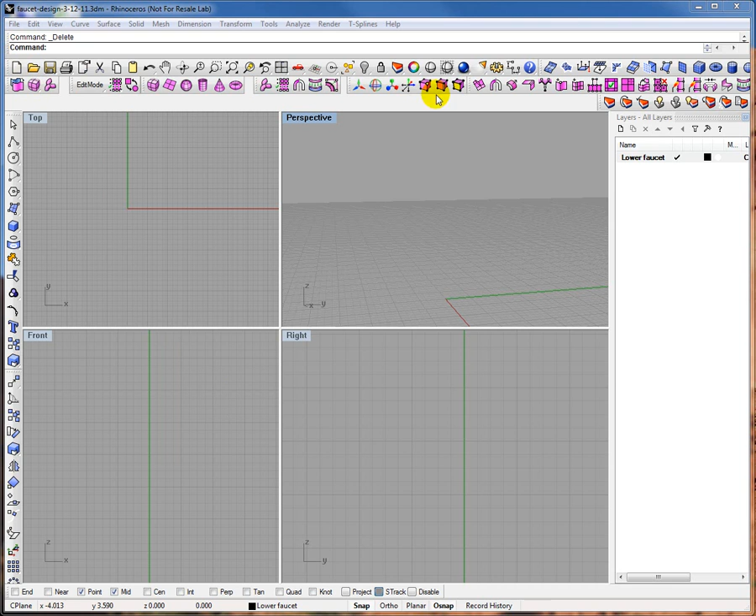So the way we're going to start this faucet design is to create a simple mesh primitive. I'll start in the top plane and make a 3-inch diameter mesh primitive. It's 8-sided, and for purposes I'll explain in a moment, I'm going to grab this and rotate it about that midpoint so this face aligns parallel with my x-axis.

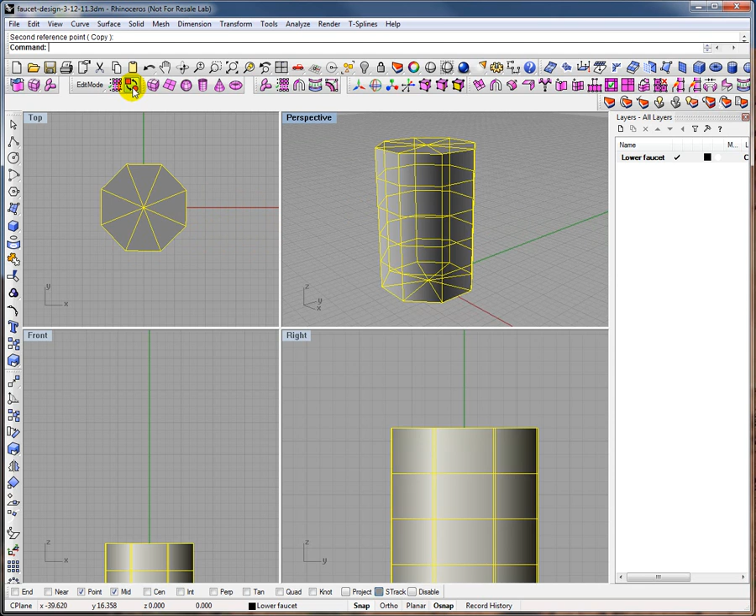Okay, so let's go ahead and just go right into T-Splines by converting this to a T-Spline and then showing it in smooth mode. So now we have that mesh toggled into a T-Spline and showing smooth.

The next thing I want to do is make this a more realistic looking cylinder with hard edges at the top and bottom. T-Splines by default, when they're created, are completely smooth objects. But fortunately we have a crease command to make hard edges.

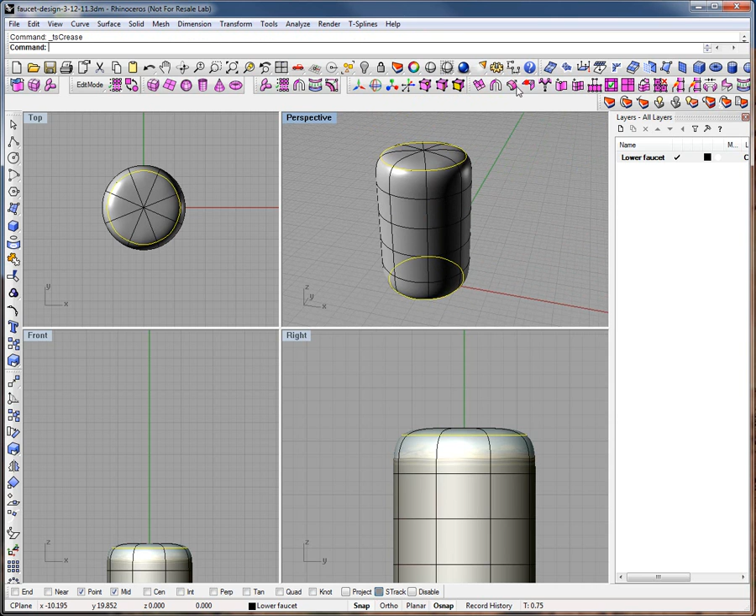So I'm going to go ahead and grab these edges and do the same with these edges, and apply a hard crease to the top and bottom.

Now I'm ready to go in and do a little bit of manipulation to my T-Spline to get the features I want. So what I'm going to do here is take this front face and start pulling it out to make my faucet design.

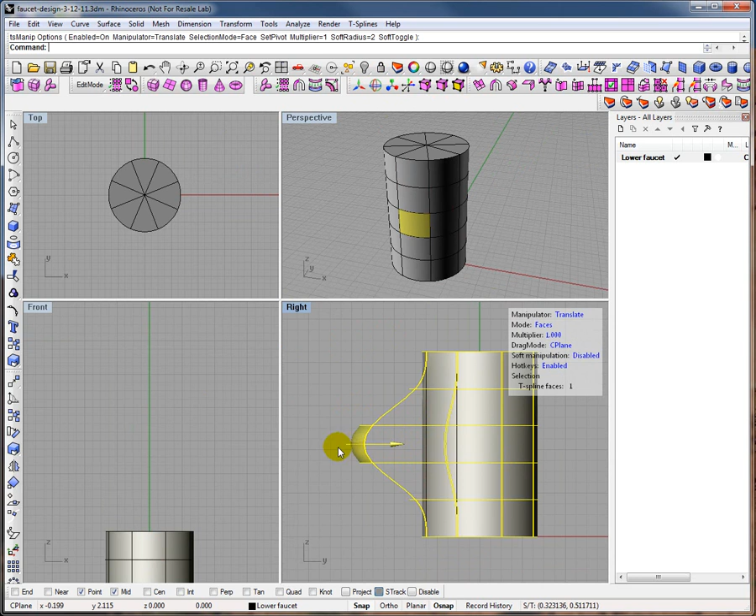So enabling that face, I can just start pulling on the model, pulling it out a bit, pulling it up a bit. Then in my top view I can turn on vertex selection and scale that out to get a little bit wider, rounder front end to the spout area of my faucet.

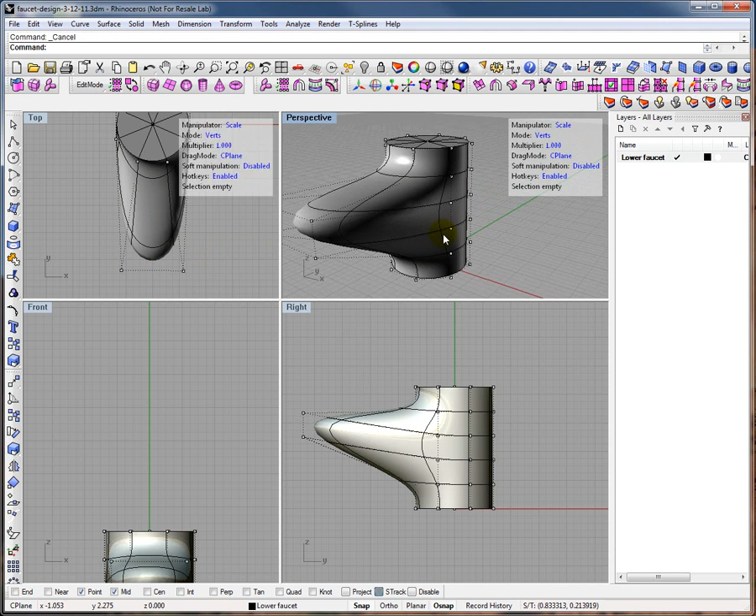Okay, so at this point I want to add another hard crease to this design. I'm just going to pick these front edges and apply a crease to those. You've seen designs like this from Kohler or American Standard, it's kind of a 90s design.

So I've got pretty much what I need, but now I just need to do a bit of adjustment. One of the things here is that this edge, if I get the whole loop by double clicking on it, at least I should be able to get the whole loop.

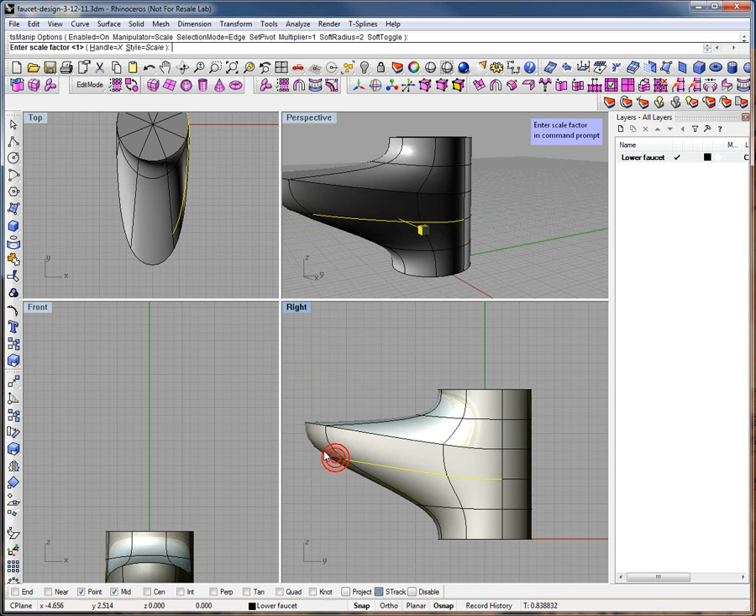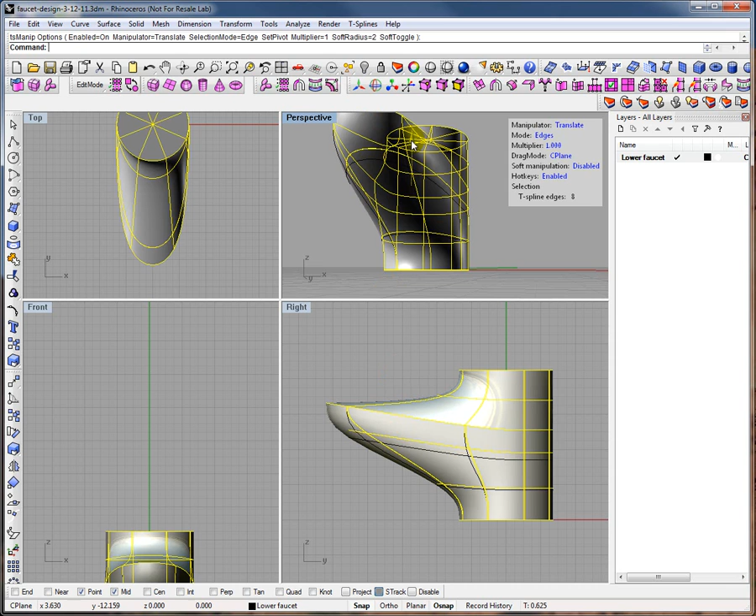Let's do that again, dropping out of our edit mode. There we go. I want to take that whole thing and move it up by a certain value. And then I see I'm getting too much of a sharp transition here in the front.

So I'll just pull that out again by grabbing these verts like so. And then I also want to pull these up too, so let's go ahead and grab those and pull those up like so. That's more like what I need.

But the whole thing's a little high now, so I can just grab all of those and pull them down. There we go. Let's do a bit more adjustment here.

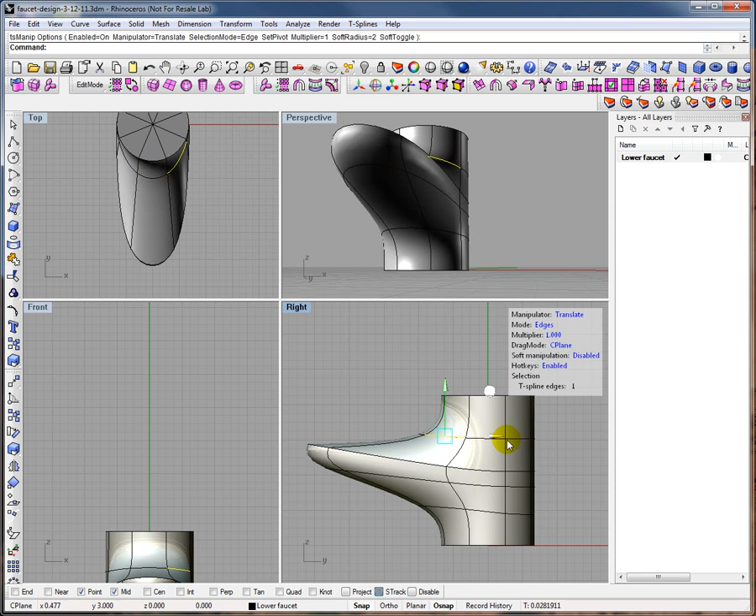Okay, that's looking good. Let's go ahead and grab this top edge again and pull it down. There we go, like so. Okay, that's looking good now.

So go back to our 3/4 view. We've got the basis for the lower end of our faucet design.

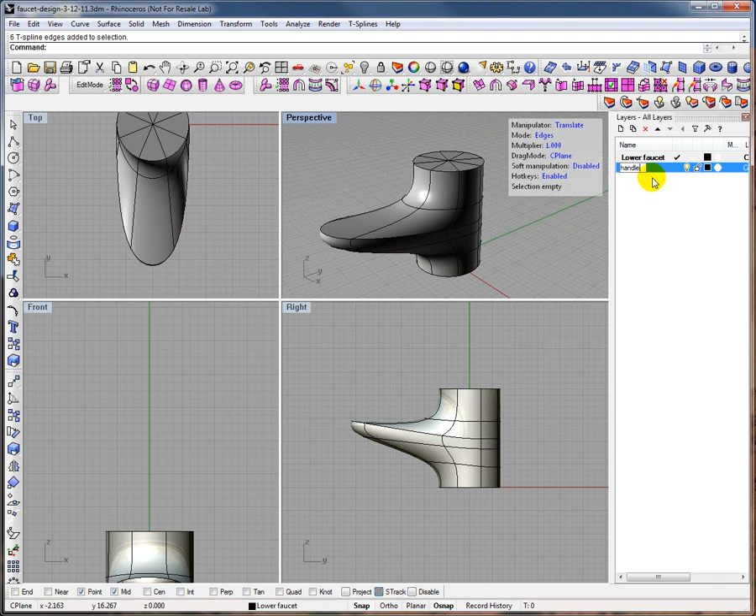So now what I'm going to do is create a new layer, call this handle, and go ahead and make it active. On it, I'll start a new T-Spline. So you can create multiple T-Splines and bring those multiple T-Splines into SolidWorks.

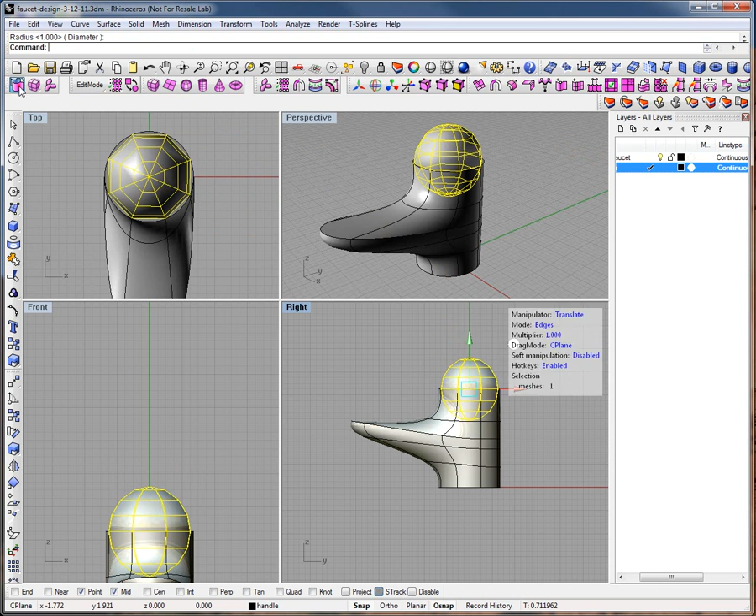So let's go ahead and create a spherical mesh primitive on the top here, and let's go ahead and convert that to a T-Spline. And there we've got it.

So we can take that object now and we can scale it. Let's go ahead and take that and just pull on it to make it match. Oops, I grabbed everything and I shouldn't have done that.

Okay, let's just grab this and then scale it. There we go. Okay, and let's get that back into a smooth mode.

Maybe... there we go. Okay, back where we need to be. So looks like that just needs to be scaled just a bit more.

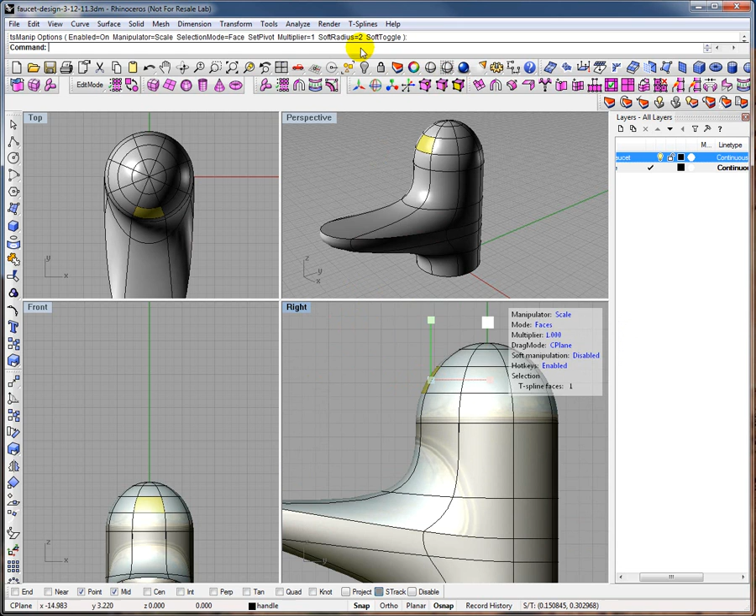That's good. Okay, so now let's go ahead and make our handle shape coming out of the front of this spout area. I'm going to just take and grab on this face here and pull it out.

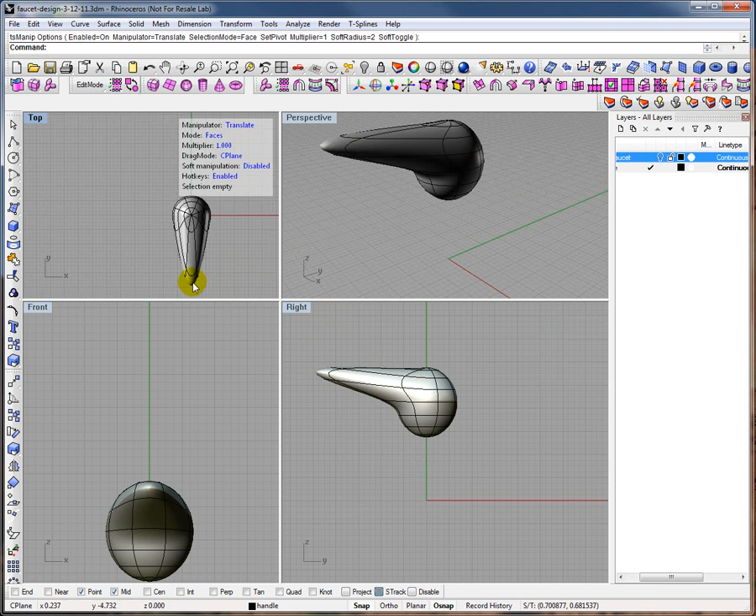And pull it up a bit to match our faucet area. Let's hide this for a moment and grab the verts in front here, and scale those along the x-axis to make it a little broader up front.

Okay, and then I want to go ahead and grab all these top edges and put a crease on them. So I'm going to crease those.

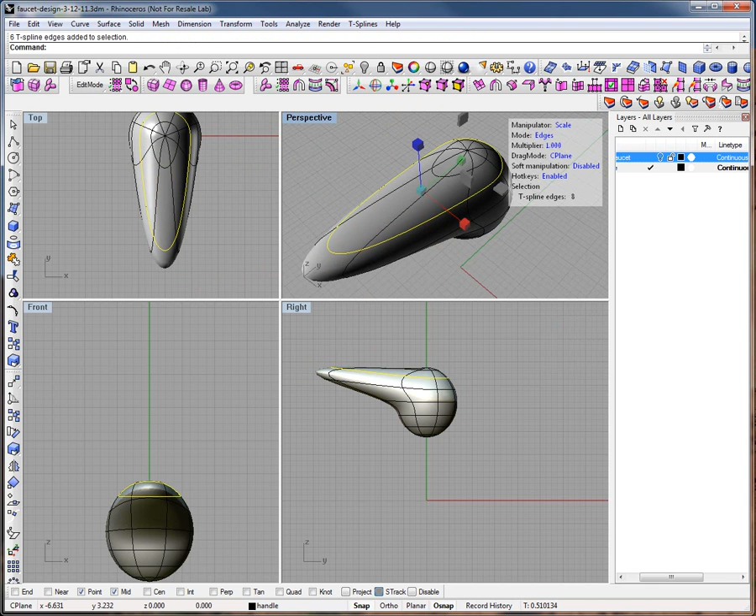And then I'll grab my vertices here for this dome and pull that down a bit, or I can scale it actually by this axis and then pull it down like so.

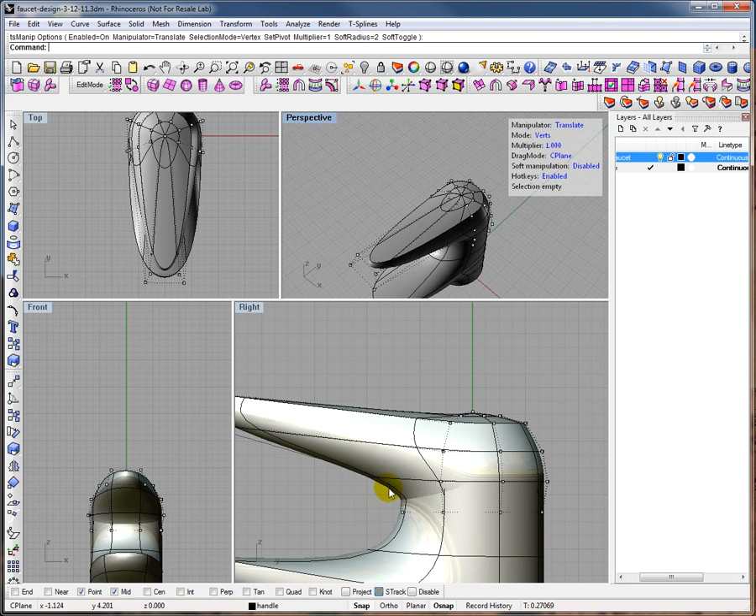Okay, so one thing I noticed here is if I turn on my layer for my bottom, is that we've got a mismatch between these two here. I think what I can do as a strategy is grab these verts and pull them in a bit, or create a new crease here to tighten this area up. So I'm going to add an edge to the model.

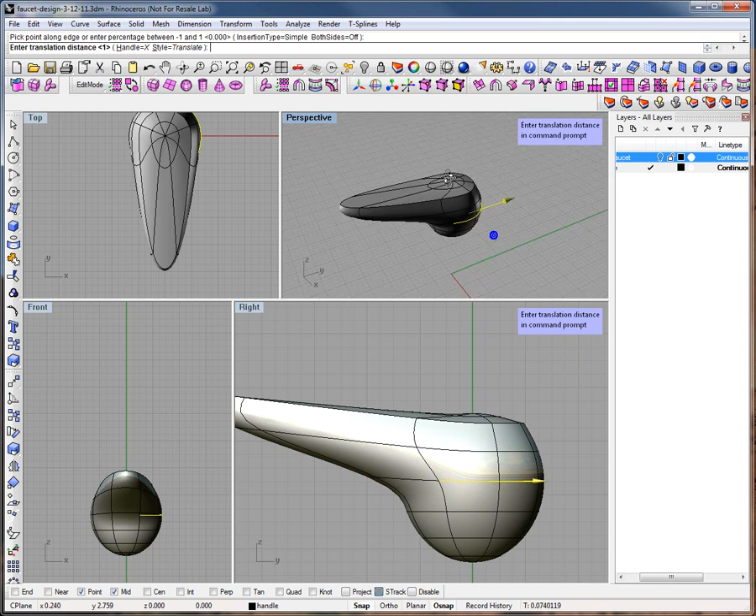Using this edge I'm going to add a crease right in here, but I need to grab all of that - let's do that in our 3/4 view here. There we go. And now we can go in and add an edge right in here to the model. There we go, and now you can see we've gotten a sharper transition because we've added new topology.

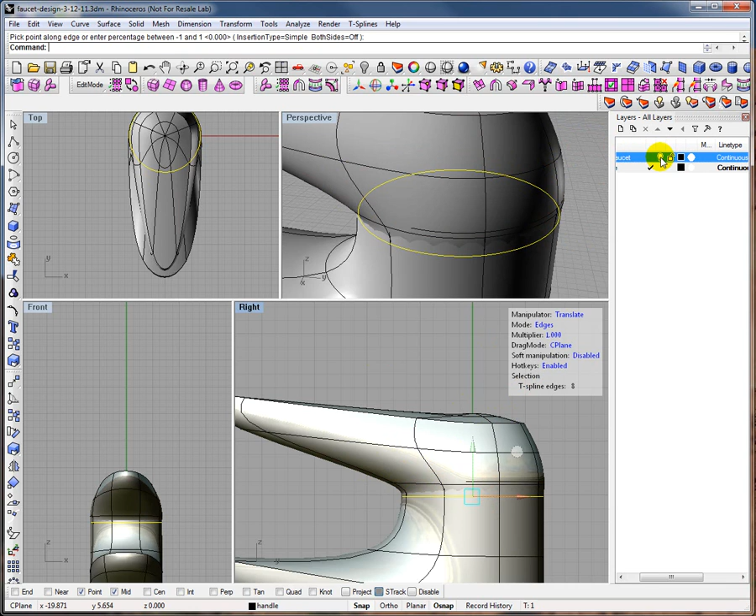To the sub D. So let's go ahead and turn that on again, we can see a little bit better match. And now with that in place, I can just grab these verts up front here and maybe scale those in from the top. So let's do that.

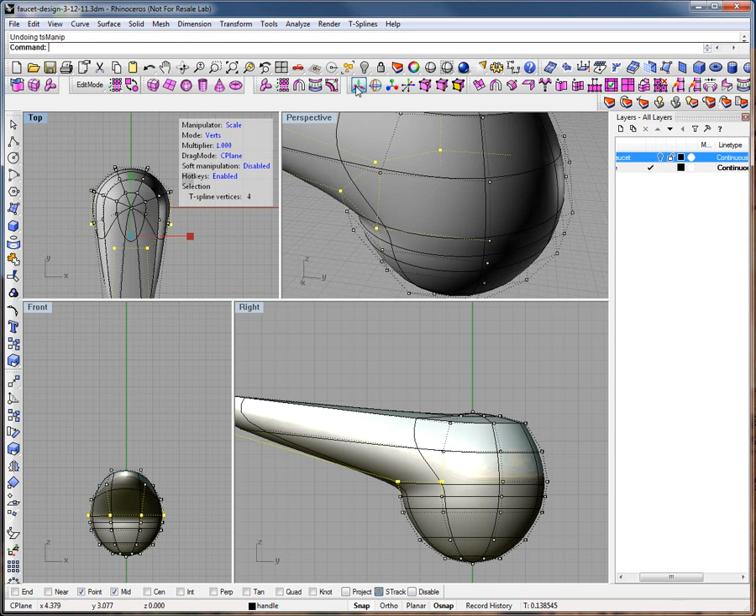There we go, let's maybe just pull them back a bit. And then to get a tighter radius here, we can actually just grab these verts and pull them up to here. So now we have a pretty good match on that bottom.

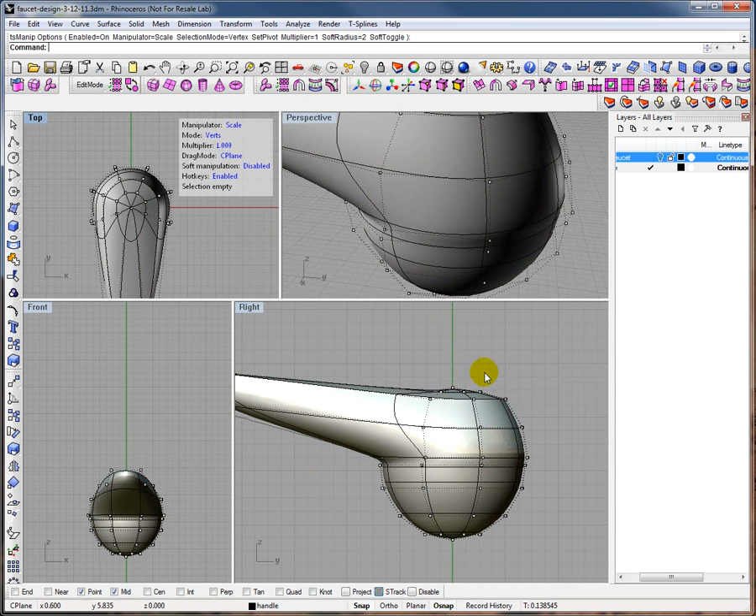I think to get these transitions here to work a little bit better, we'll just scale those back a bit. Okay, so there we got it.

So of course we could do a lot more, but with the time I have to present this, I'll just kind of move ahead. So now we've got a basis for design. So let's get over to SolidWorks and see what we can do there.

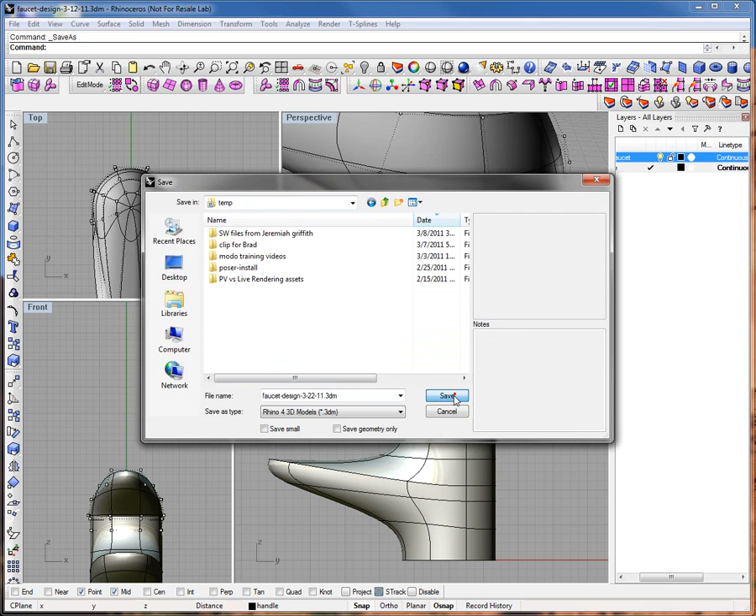So first I'm going to save this out as a faucet design by today's date, and just put it over in my temp directory. And we saved that. So let's bring up SolidWorks and open up that T-Spline file.

So here you can see we can import TSM files or OBJ files. I'm going to pick this, go to my temp directory, and then go and open up that T-Spline file. So you know what? I think I didn't save it as TSM out of Rhino, I saved it as a Rhino file.

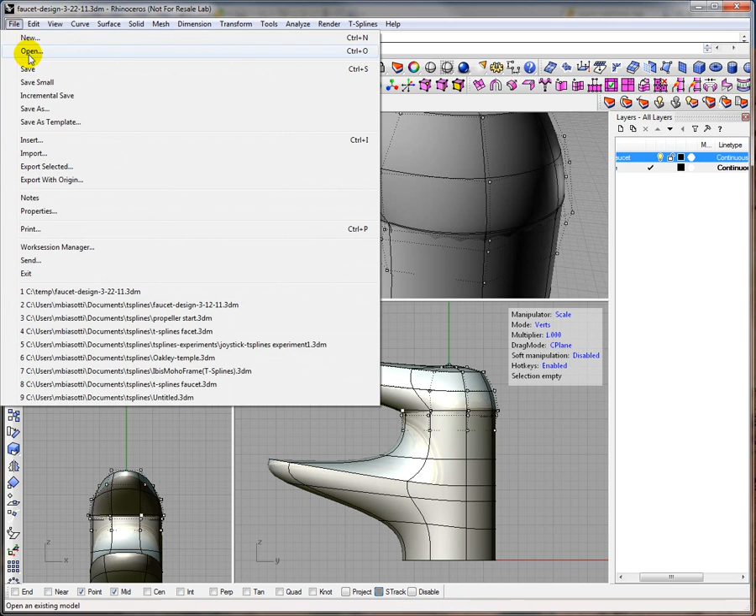So let's save as a TSM file. And you can't see it here because this is too high, but let's go down right here to our temp. Okay, that looks good. Okay, so let's jump over to SolidWorks and open up those TSM files, and let's make sure that comes in an inch.

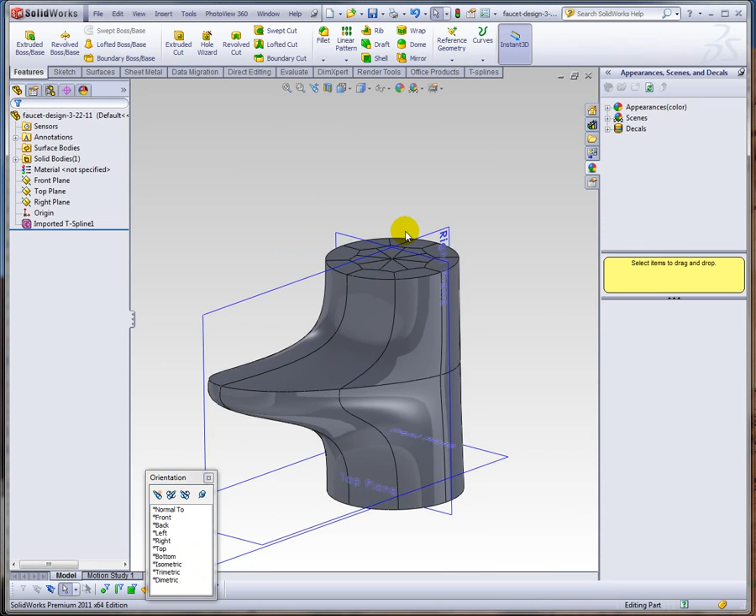Okay, so one kind of byproduct of doing a crease in a T-spline in Rhino is that you get this kind of result in SolidWorks. Now this is completely planar, but it's segmented to get the sub D solution, and I could delete all these faces using my delete face command and then build a planar surface there pretty easily.

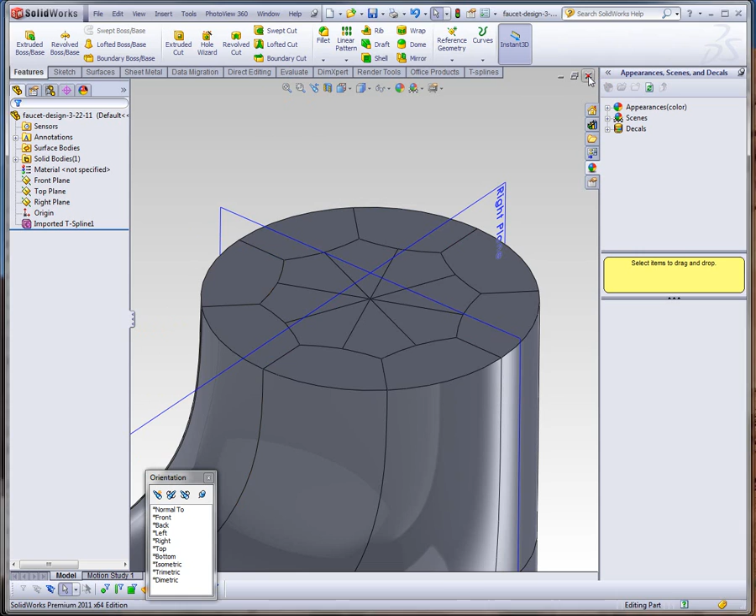But alternately, we could also just remove that face in Rhino. And so let's do this. Let's just pick these faces and hit our delete key. And let's do the same for the bottom faces.

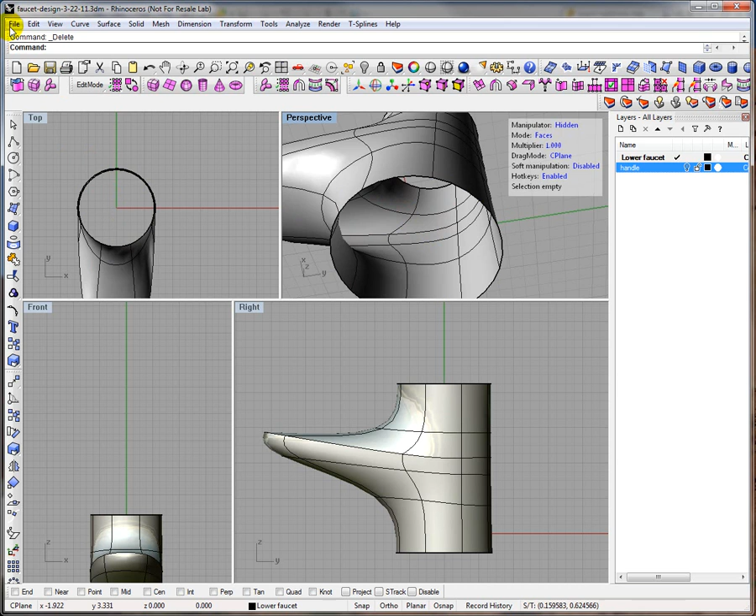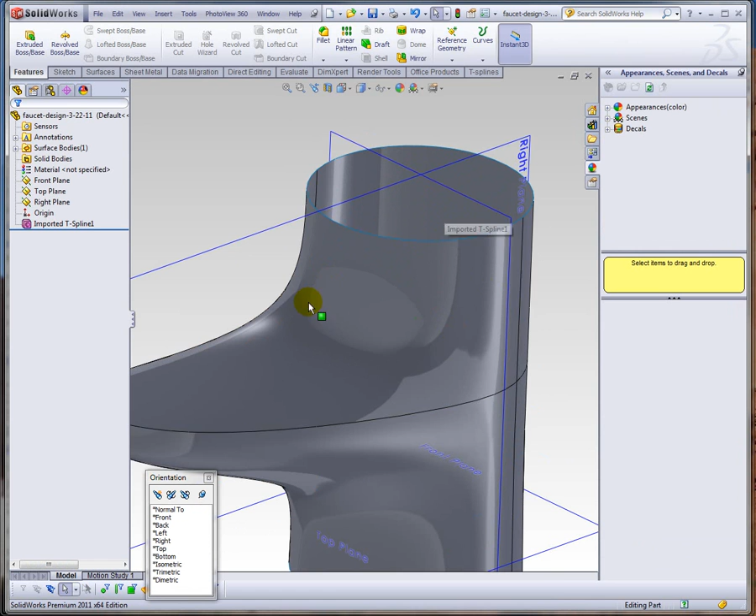And now let's go ahead and just save again this T-Spline file. Let's go back to SolidWorks and open that up again. I don't know if you can see this, but here's the drop down for 3DM file type. Okay, there you have it, we have the T-Spline surface body now, but without these faces.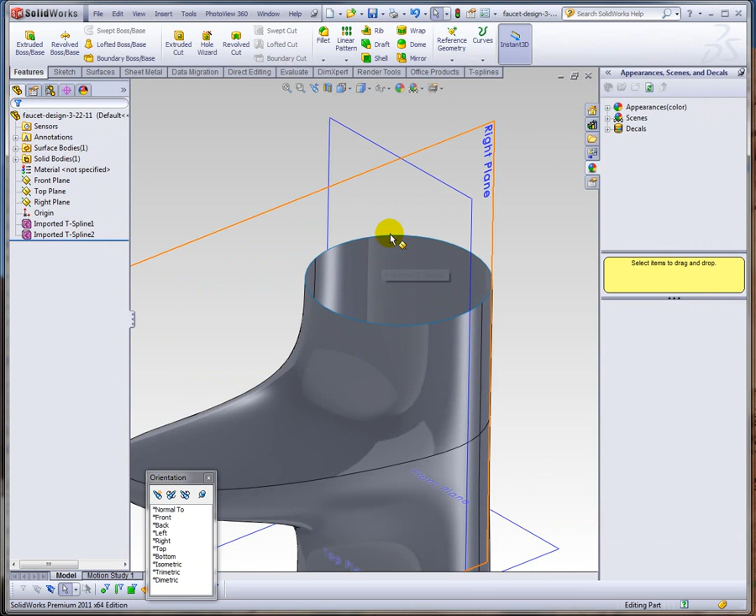So while we're here, let's just go ahead and load the handle also, and let's make sure it comes into the same current file in inches. There we go. So let's go ahead and hide the handle for the time being, and let's just make this solid again. We can do that really easily.

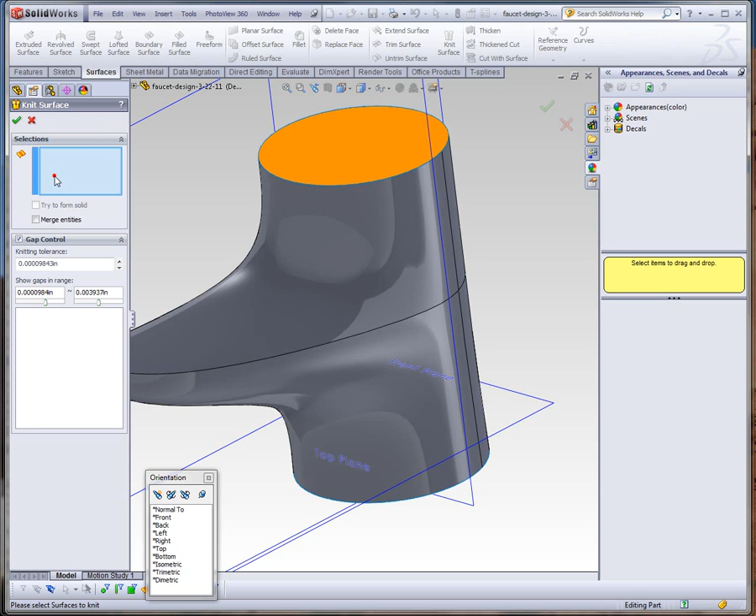Again, as I said, by using planar surface, selecting open loop, doing the same on the bottom here, open loop. Okay, and then going and knitting this up using these faces and making solid.

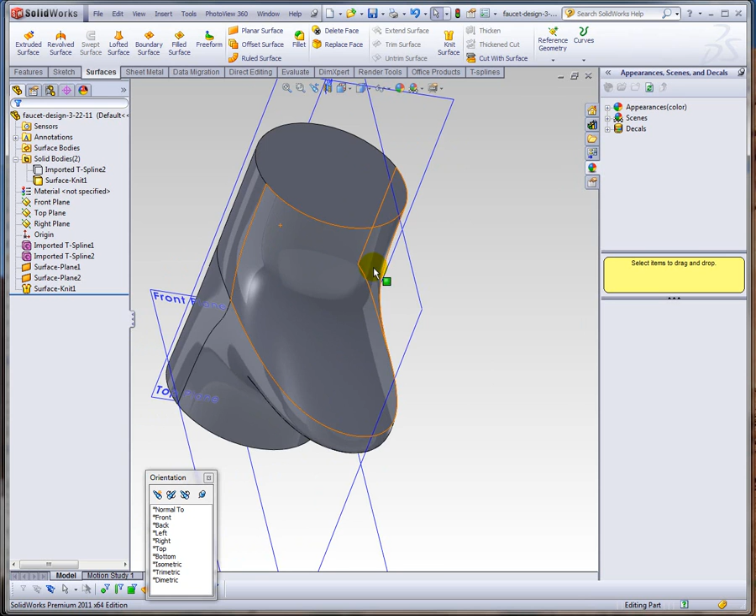There you go, so you can see that we have a solid model, or two solid bodies, handle and the lower part. But you know what, I see something here I don't like, and that is that I must have pulled something in Rhino here to make this asymmetrical from left to right side.

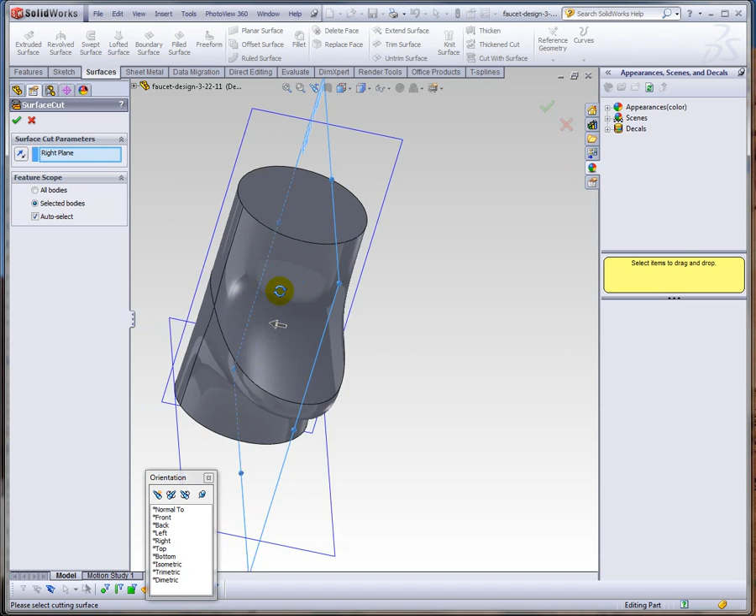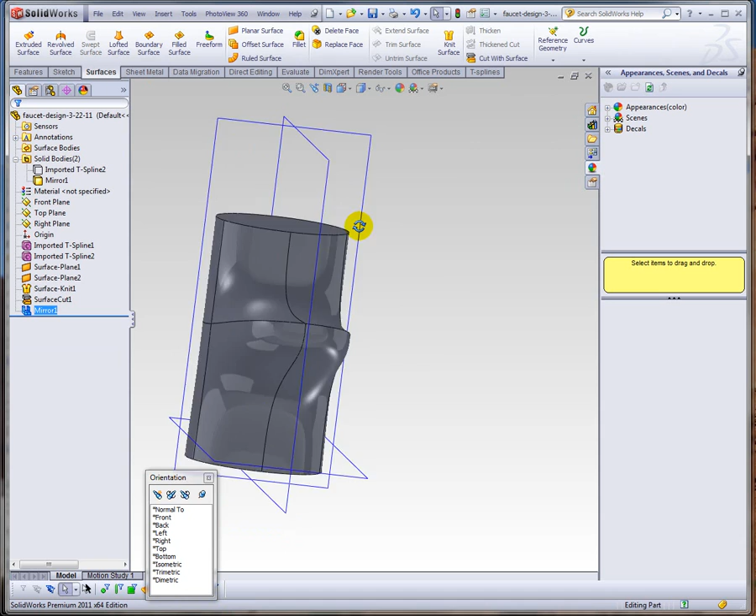So I'm just going to quickly cut this solid using this plane. And let's see, we want actually this side here. So picking this body, we'll keep that side, then we'll mirror it back - feature mirror using this body across the right plane, merging it, and now we've got something that's symmetrical.

And so now at this point, let's go ahead and just start shelling. So we're going to use these as a remove faces, give it a 1/10 of an inch wall, and now we've got a shell.

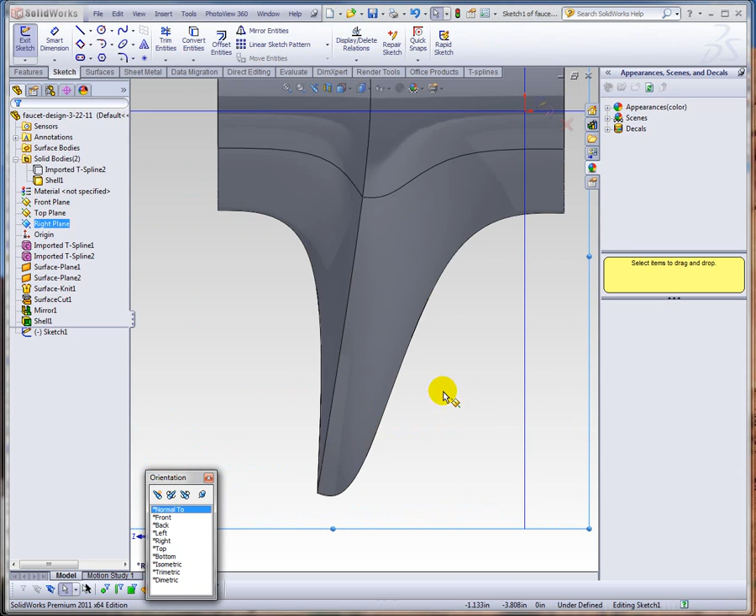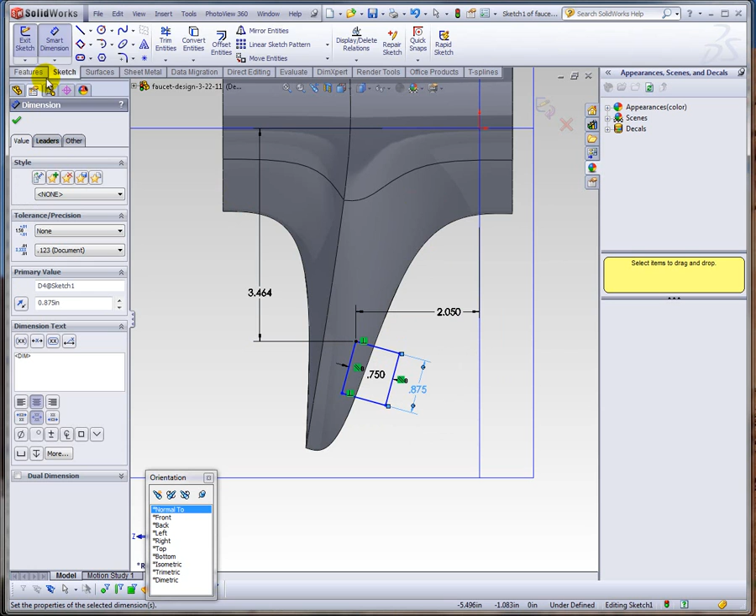Now let's go further and use SolidWorks for the things we want to do here, and that is to create some details. I'm going to create a spout detail, revolve this shape, and give it some positional dimensions from top plane, front plane, a distance here, and a revolve of .750. Let's go ahead and revolve that using this as our axis, and merge it right into our lower faucet design.

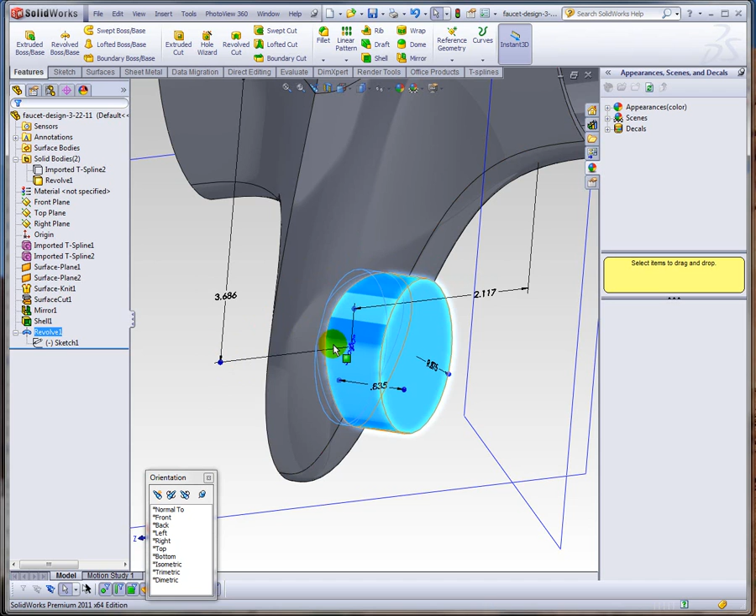You know what, I think it's a little big and a little too far back, so let's do some adjustments here. Let's bring it out a bit, forward a bit, and reduce its diameter a bit. Okay, I think that looks good.

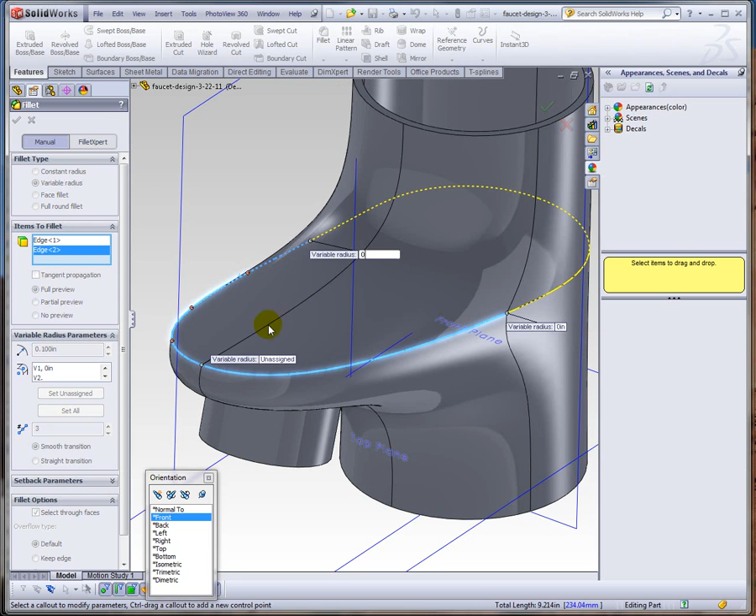Now, since you can't really have sharp edges in castings like this, let's put a variable fillet right here. We'll use a variable fillet, picking these edges, turning off tangent propagation, making the beginning and ends 0, and the forward 1/10 of an inch.

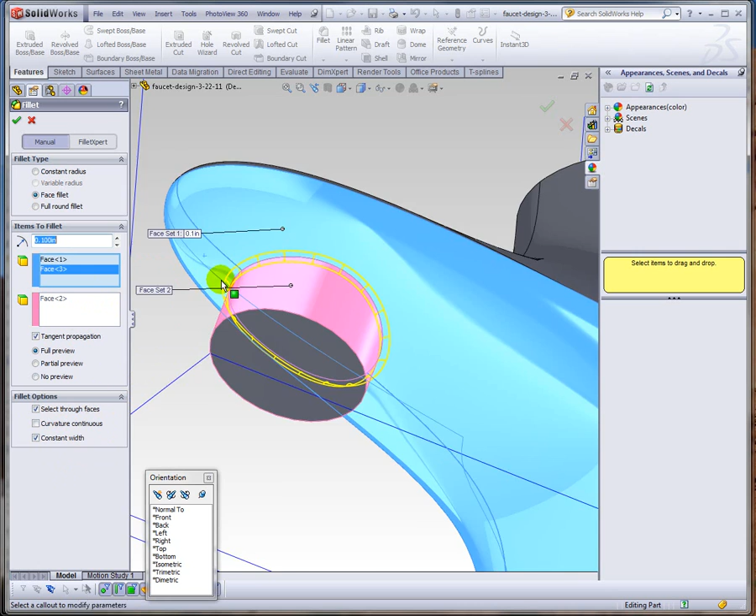And then let's also put a nice fillet transition here, but since the angle of incidence changes quite a bit between these two faces, I'm going to use face to face, and then make it constant width. That way we get a nicer transition between the two. Let's include that there, and bring it up to about 0.3. Now we've got a really nice transition in the spout area.

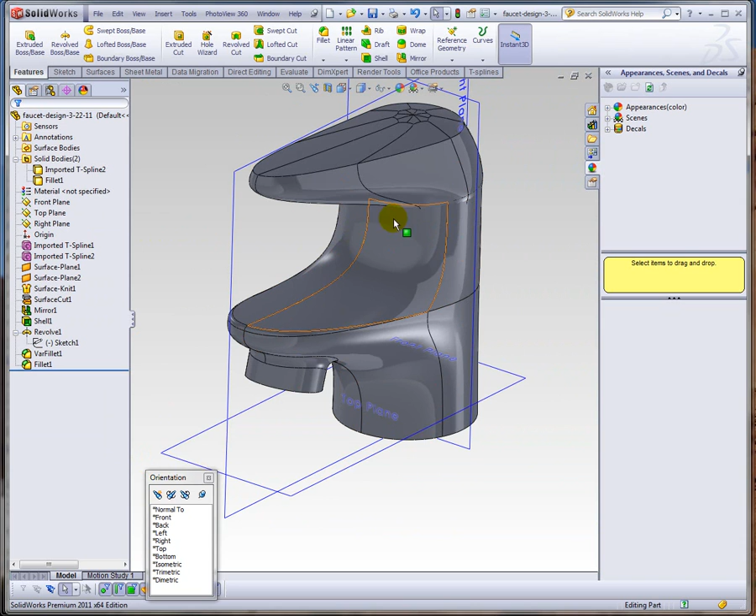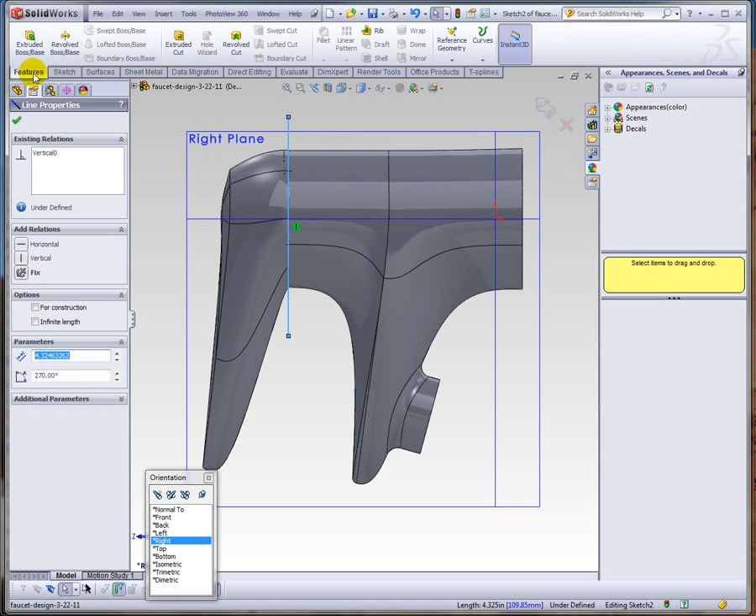Let's go back and focus our attention on the handle. I'm just interested in making a rendering basically of this, and we'll do more detail later in our design. I'm just going to cut off part of this top handle, even though the ball area would be included as part of the actual mechanism. So I'll make a simple cut, removing this side of the handle, and then do a move face on this little top face here, if I can get to it. There we go.

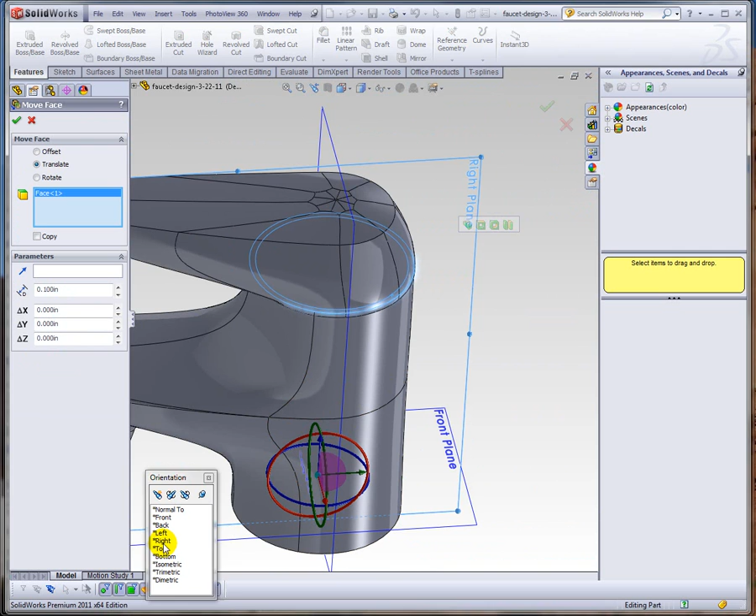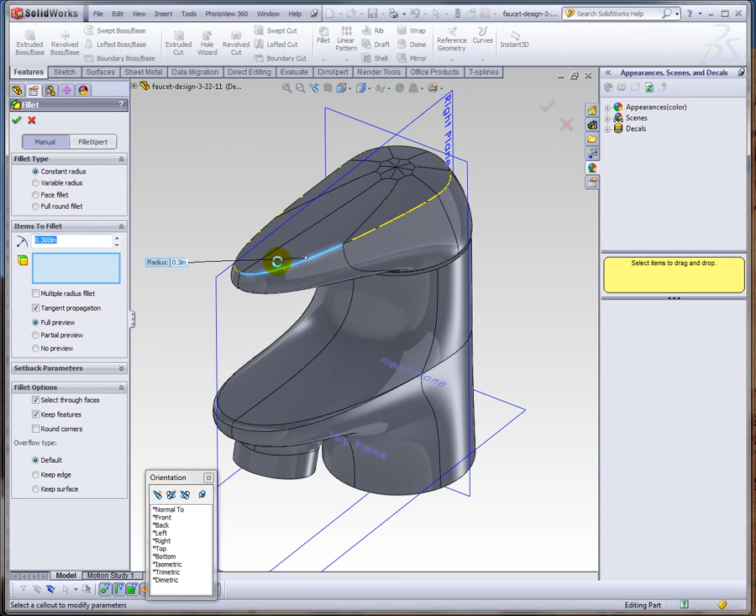Now let's go to the right view, and pull that back, so we have a nice little appearance gap. There we go. So we can add a constant fillet up here too. Try to do that. Too big a fillet, so I want to go down to something like 0.3. Should be nicer, and pretty much have my faucet design.

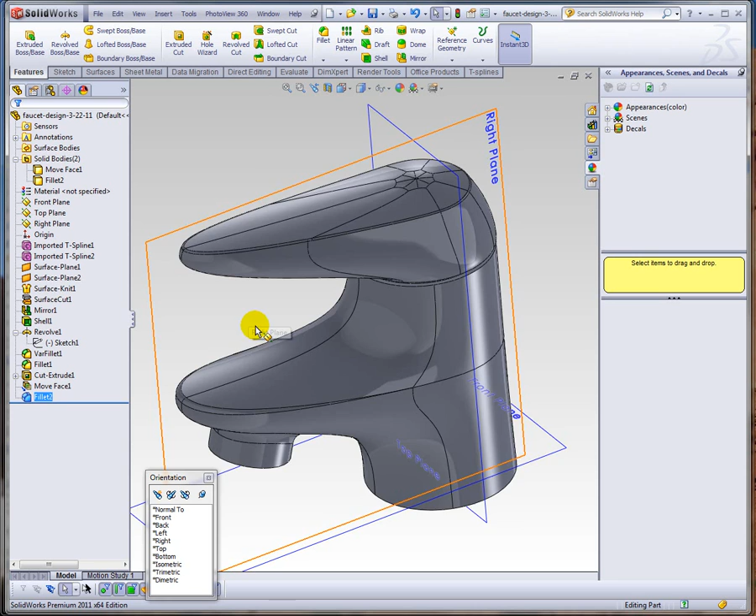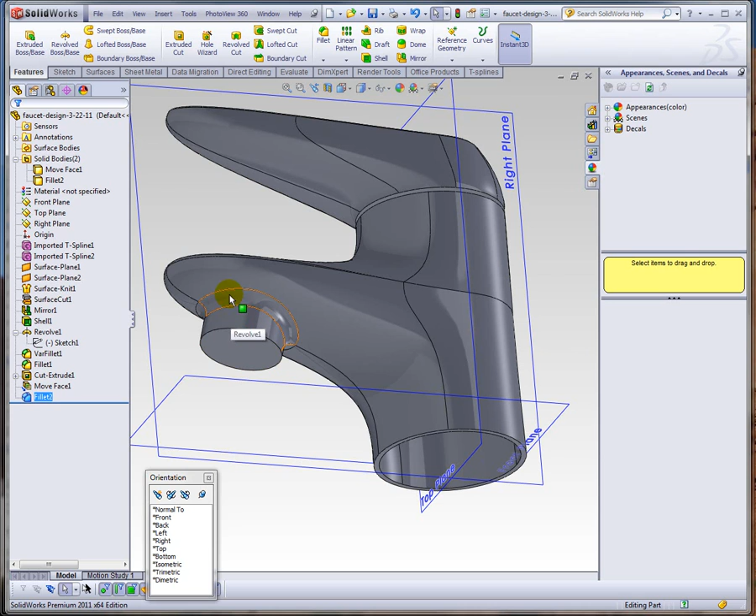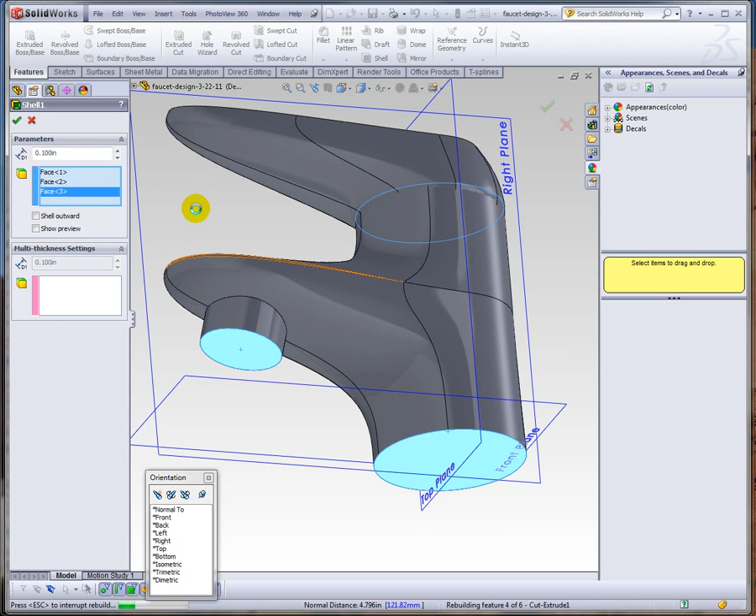So what if something needs to change here, given some engineering parameters? We can do that with our T-Spline features directly in here. But one other thing I want to do here is just use the power of SolidWorks. That shell, we did that, this revolve feature and the fillet, after the shell. So let's go ahead and include this in the shell feature. I'm going to drop down the shell to after this, and then as part of the shell definition, we'll just include this face as part of the remove. I also could have included the variable fillet too, but for time's sake here we won't.

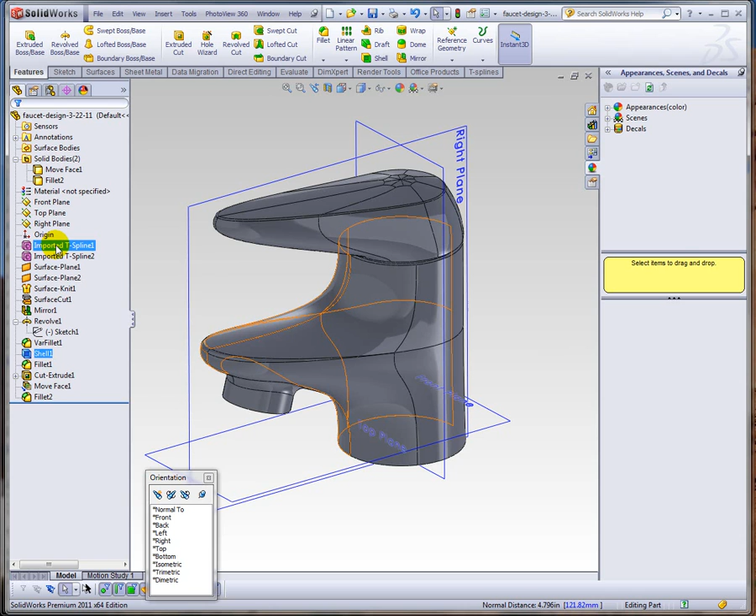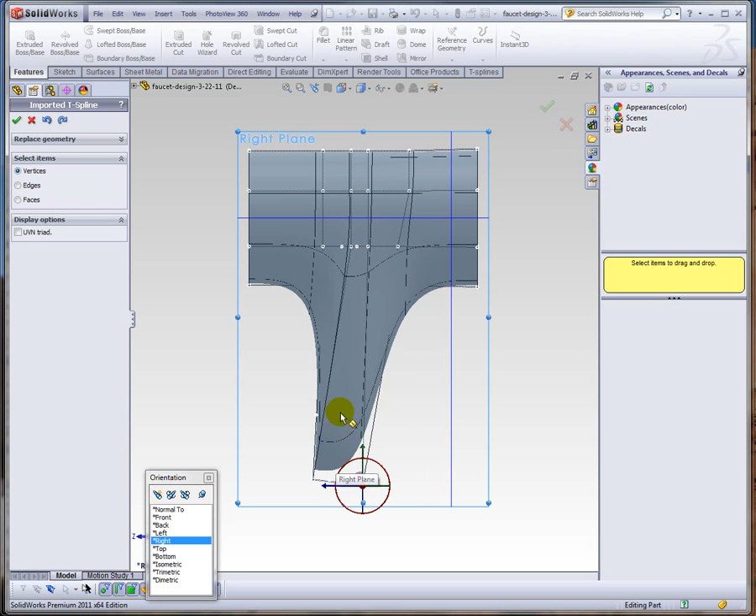So now what's interesting is that if we want to do any adjustments on this, we can do that by editing one or both of our T-Spline surfaces. So let's say I actually wanted to do some adjustment here, and I'm going to pick our T-Spline here, and in my right view say I want to actually kind of pull down this area, bring it in a little bit more. I need more material at the end here.

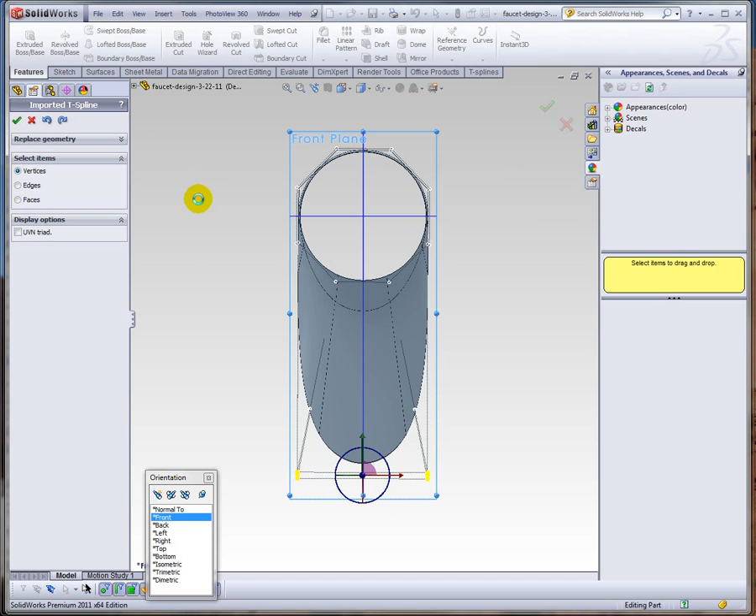And let's say from a front view, I actually want to take these points here and kind of grow those out. I'm holding down my shift key and I get that symmetrical behavior. So now when I rebuild, I should get everything back. I'm on a debug version, that's why I get that. And sure enough, everything is good to go.

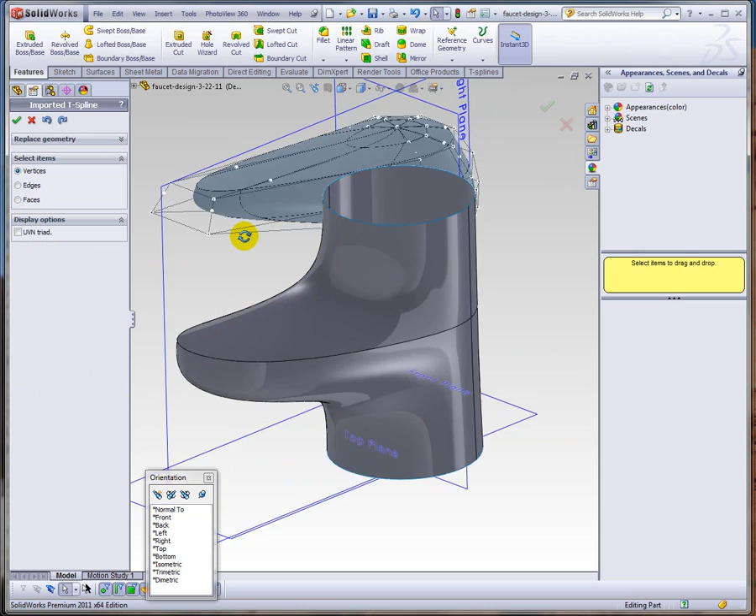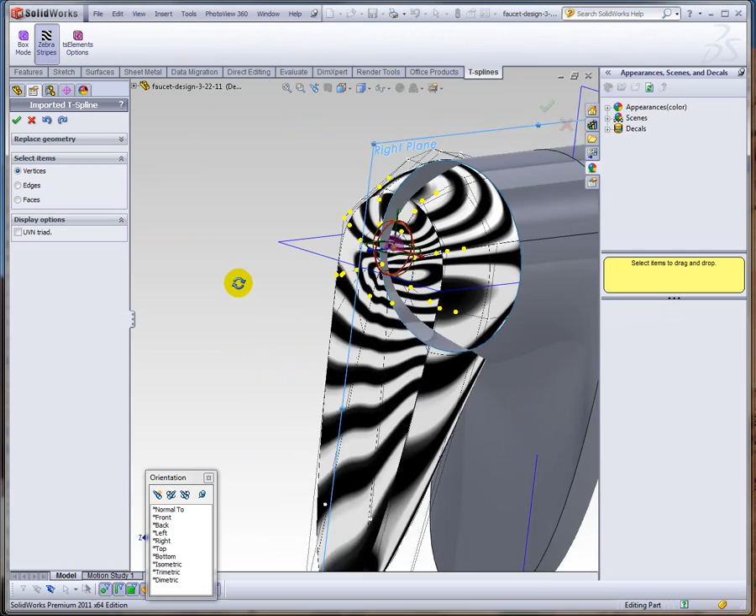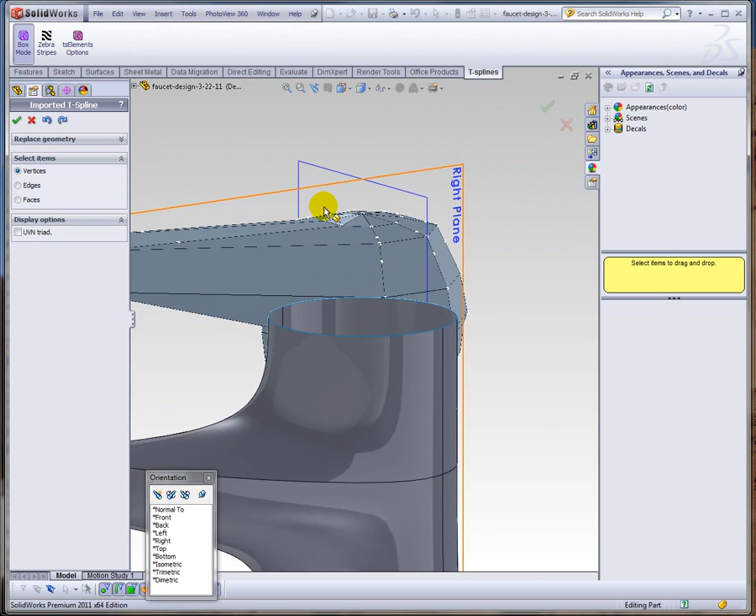Now a couple other things to point out: when I'm editing a T-Spline here in SolidWorks, I can actually see it in zebra, and as I pull things up, I get my zebras to show also, if that's important to you, so you can see what's going on. And alternately, I can also show box mode. This is where the original T-Spline started, from a polygonal mesh, so if it's easier for you to visualize, you can put it into this mode and pull on things using that.

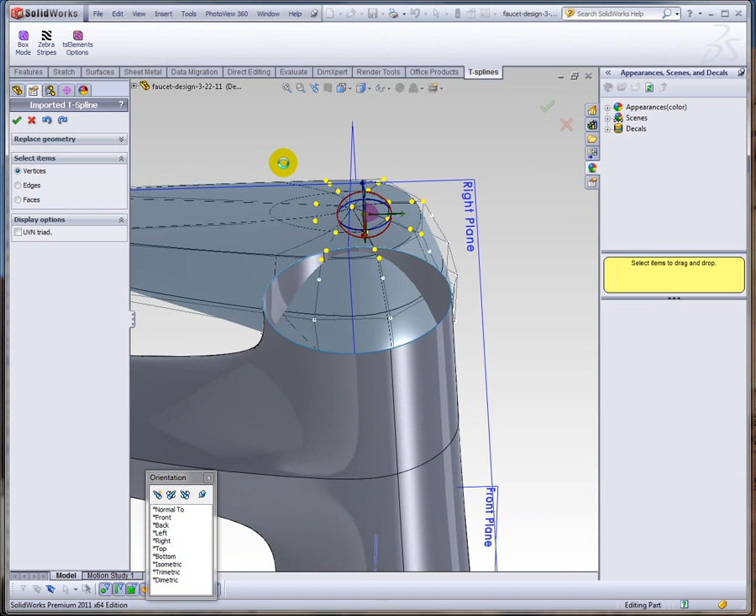If that suits your fancy, you can do that also. And then you can just turn off box mode, rebuild, and you get everything. So that's pretty much it for the time I have here, to show you how that workflow can work.